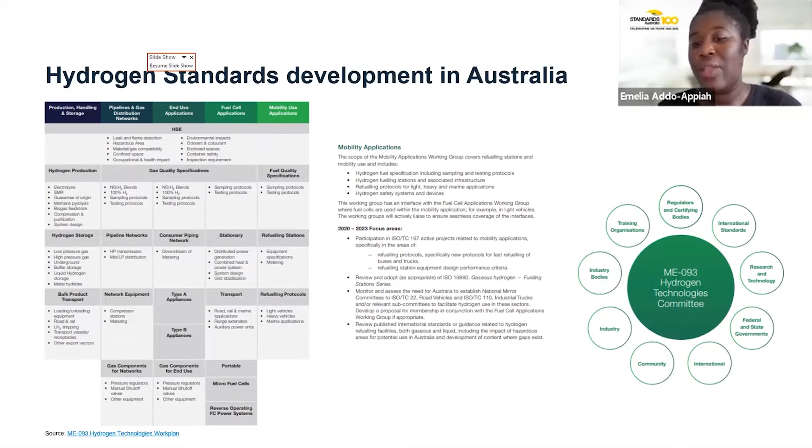So we have 5 different working groups working in this area and focusing on various parts of the supply chain. It might be a little bit hard to see, but we've got production, storage and handling, pipelines and gas distribution networks, end-use appliances, fuel cell applications and mobility use applications as well.

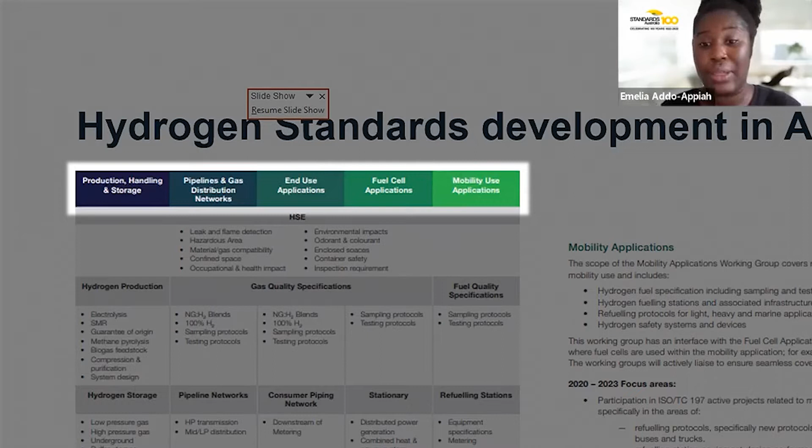What you'll find is the various standards that we've published and a summary of the objectives and also the use cases, which is going to be very useful for industry.

We get lots of questions about what standards have been published and where Standards Australia are at, and we will endeavour to ensure that we do keep our hydrogen page up to date with the relevant information because lots of work is happening. So we have a key role in influencing and actively participating in the international arena.

Our MOU with the government encourages us, to the extent feasible, to adopt international standards and to foster international harmonisation.

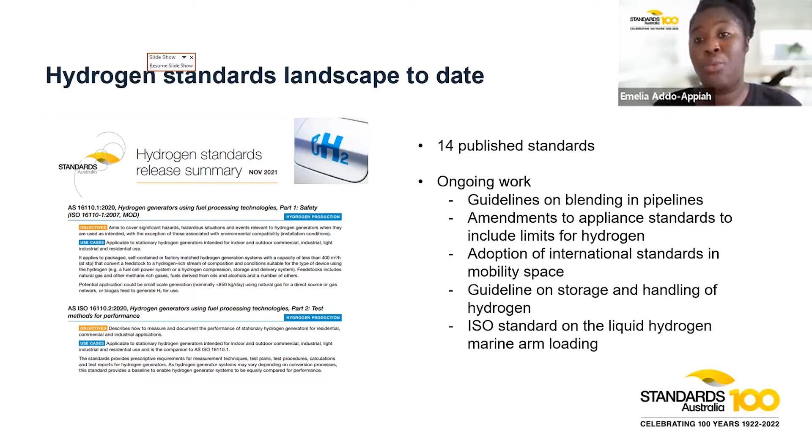We are in the process of developing an international ISO standard on marine transfer arms for liquid hydrogen. This work is actively happening at the ISO level and hopefully will be available shortly. What will most likely happen is, as we've actively contributed to that, we'll be able to then subsequently adopt that here in Australia as well.

So there has been some standards mapping done to date, and this work is the work of the Future Fuels CRC to look at the standards and also regulations. This work does talk about the work impacting the gas infrastructure, and also DISER are doing some work, and I know Amy will touch on that in her presentation after me as well.

So the National Hydrogen Strategy commitments about regulatory review are about improving hydrogen safety and ensuring consistency of those requirements. They are about improving the efficiency and transparency of regulatory approvals, ensuring that we have international competitiveness and consistency, and if possible, consistency across Australian states and territories, and of course trying to make our statute book adaptive to the rapid technological change that we are seeing in the hydrogen industry.

Because it's a Commonwealth, state and territory project, the way that we have gone about undertaking our review is, instead of starting with the statute book, what we have tried to do is actually start with the activities in the hydrogen industry. We have identified model hydrogen projects that we understand, either through our state and territory colleagues or industry engagement, that industry is undertaking.

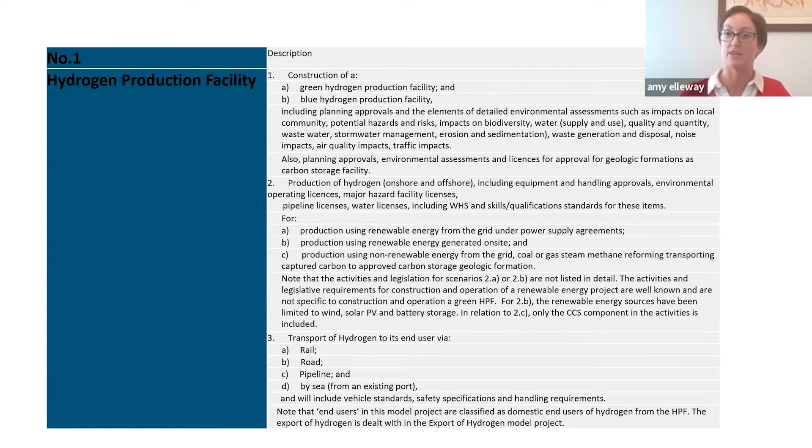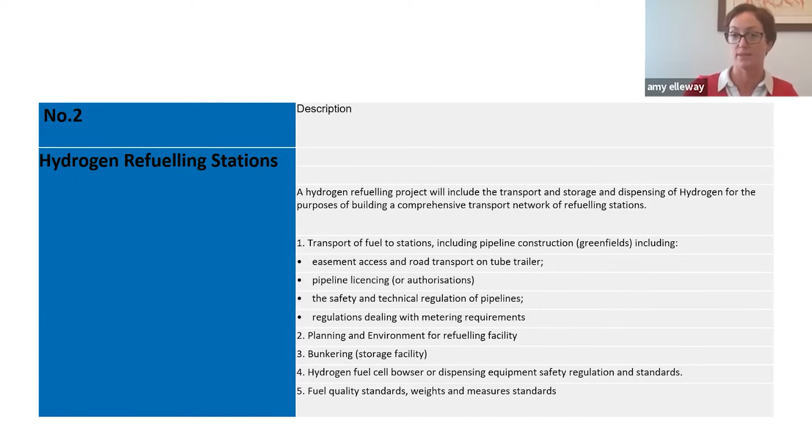You can see there that the hydrogen refueling stations is about the transport of fuel to stations, potentially the production of fuel at those stations, bunkering, hydrogen fuel cell bowser or dispensing equipment, safety regulations and standards, and fuel quality standards and weights and measures.

Transport and mobility, closely aligned with refueling, but this is more about ensuring the regulatory framework for the use of vehicles that are hydrogen fuel celled or ammonia fueled vehicles, in the very broad range of them - so passenger vehicles, heavy transport, primary production machinery, trains, and maritime vessels.

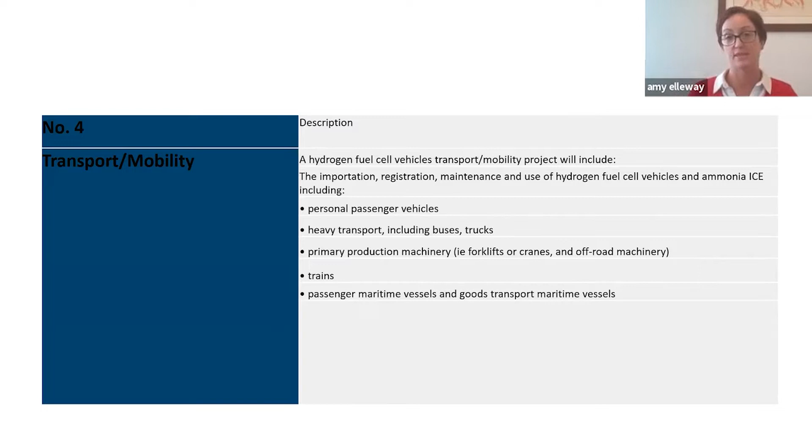Electricity generation, and as we said before, the export of hydrogen. The export of hydrogen is a little bit broad, but not as broad as what this group today is discussing, and we have limited that project essentially to getting it off the dock in Australia and getting it onto the dock on the other side, insofar as that relates to domestic regulation that may implement domestically the range of our free trade agreement obligations or other trading obligations that we implement domestically with regulation.

in Australia. And we consider in this regulatory space that there are a number of things that we can do to potentially remove barriers and improve efficiency in regulatory decision making and compliance and approvals for industry, if we, for example, simply do a better job of transparency and of mapping our regulatory compliance pathways for our industry.

These are the breadth of options for improvement we would potentially look at in terms of the assessment of our regulatory map. The development of standards and our understanding of what standards can help industry understand their compliance obligations, or ensure consistency of decision making, is something we're really interested in to inform our work.

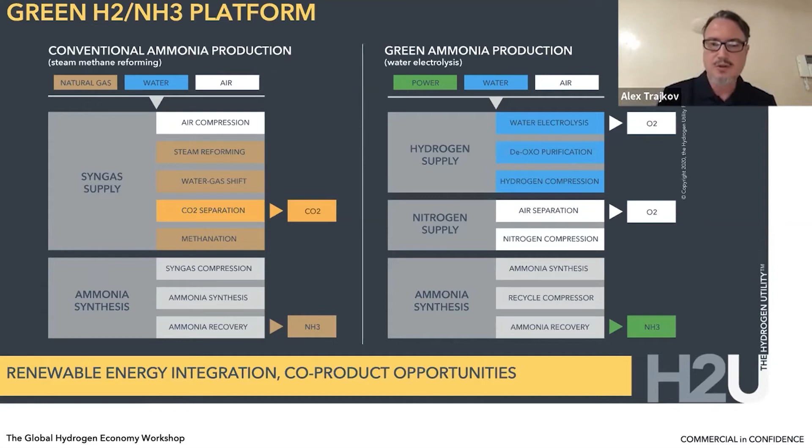Just two projects currently in the pipeline: one in the Cultana area of South Australia, and the second one up in Yarwun, in central Queensland. The project in South Australia is set to start first as a demonstration plant, then grow up to 1.5 gigawatt of electrolyzer capacity.

Within hydrogen utility, we managed to build our knowledge base, or a data bank, of various standards and regulations that a producer or manufacturer of hydrogen and ammonia has to comply with.

We had to go and identify each of the segments of production, whether that's the electrolyzer, the separations unit, the ammonia synthesis loop, or the piping to the exporting facilities at the wharf or port, as well as the transport, logistics and deliveries of packaged product, not just bulk, to various destinations within Australia, within the state, or interstate.

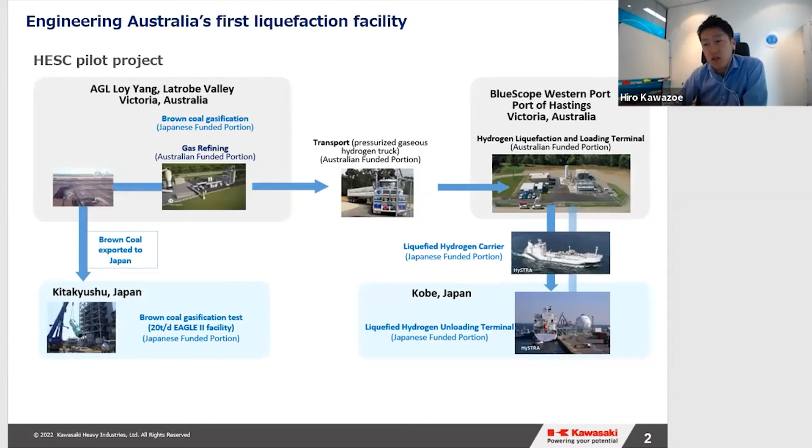The HESC project is a world-first trial to establish an international liquefied hydrogen supply chain. The project produces hydrogen from Victorian coal, transported by tube trailer to Australia's first hydrogen liquefaction facility in Hastings. Liquid hydrogen is quite common in Japan, the US, and Europe, and each country has its own regulation.

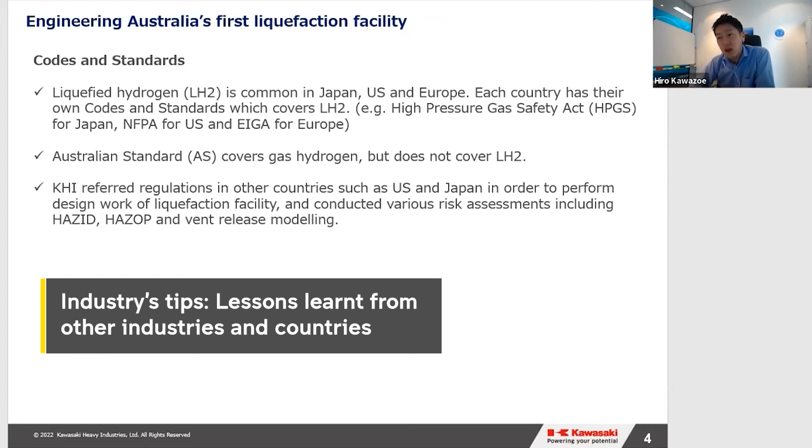For example, in Japan we have the High Pressure Gas Safety Act, and all industrial gas or liquefied gases, including liquid hydrogen, are covered by this act. However, the Australian standard doesn't cover liquid hydrogen.

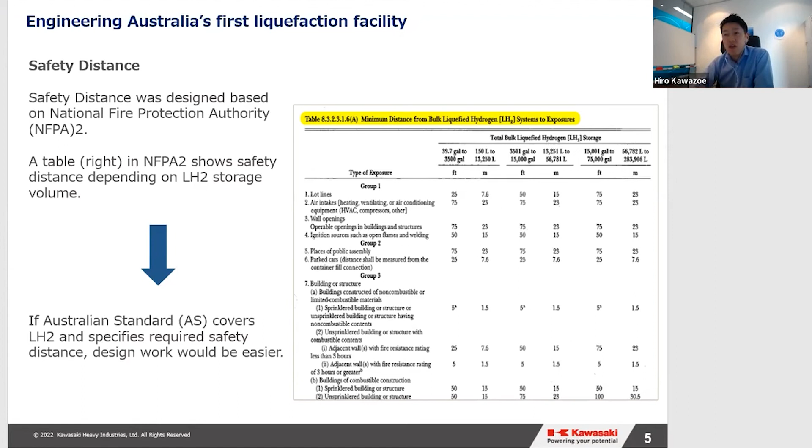Safety distance between the storage tank and other facilities would be based on modeling analysis results, so layout design would be difficult and takes time, since we need discussion with regulators each time. MDMT is a minimum design metal temperature.

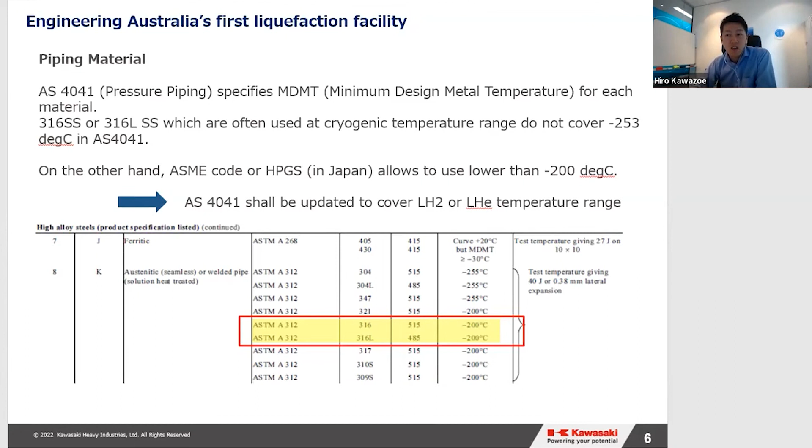Impact testing at cryogenic conditions is not required. These materials are often used at cryogenic conditions, and ASME or the Japanese High Pressure Gas Safety Act allow us to use these materials in the temperature range of liquid hydrogen or liquid helium.

Liquid hydrogen is quite new in Australia, so the Australian Standard does not cover this temperature range. For future liquid hydrogen business expansion, I think the AS should be updated to cover this temperature range.